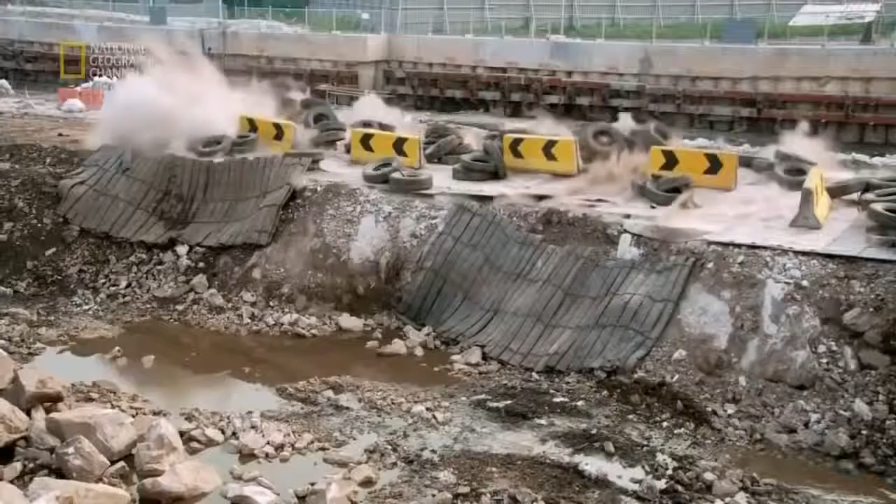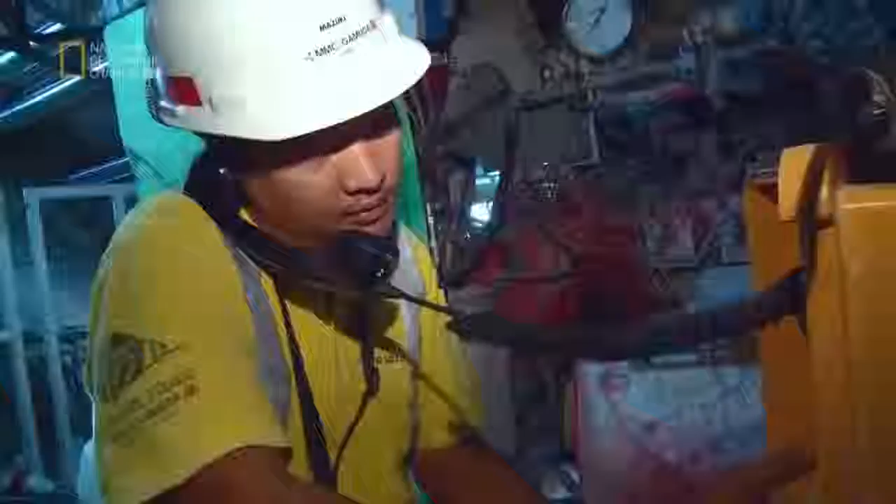Now there's an ambitious solution: a new transit system that will crisscross not only the city, but the entire region of Greater Kuala Lumpur. Huge machines will bore into Kuala Lumpur's treacherous bedrock to carve out almost 20 kilometers of tunnel. Every day of construction, the engineers confront the perils of mechanical failure, fire, and collapse. Get it wrong and billions of dollars of investment could go to waste, and the streets of Kuala Lumpur and its pent-up economy will stay trapped in gridlock.

Kuala Lumpur is one of Asia's most vibrant cities. It's looking to compete with the region's Asian tiger economies. Its magnificent skyline testifies to its soaring ambition. But at street level, it's a different story. The city is blighted by severe congestion that threatens its future growth.

Over 7 million people live and work in the Kuala Lumpur region, the Klang Valley. Every day, they head into town in 4 million cars. As an alternative, a light rail transit system was built. But over time, it has been overwhelmed, and connections are inadequate.

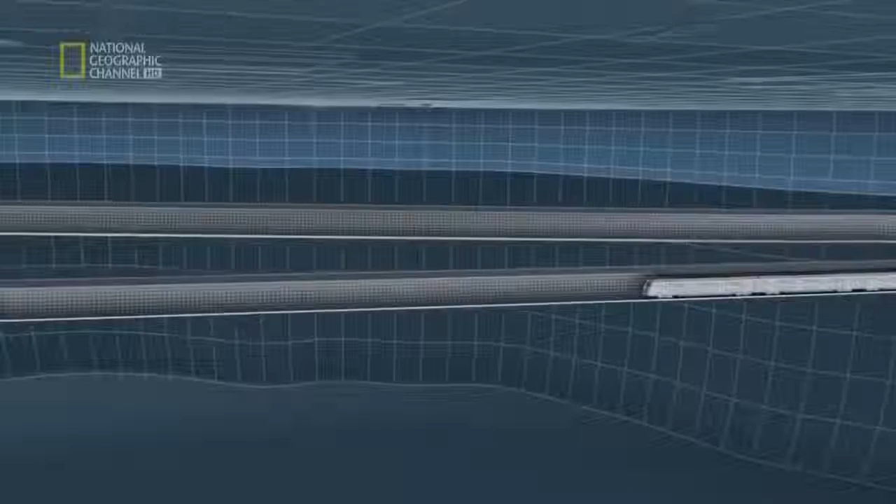Now there's a solution: a new mass rapid transit system that will reduce the pressure on traffic and unite far-flung parts of the city. For any modern metropolis to be vibrant, to be competitive, to be on par with some of the leading cities in the world, you've got to have a modern public transport system.

The Klang Valley Mass Rapid Transit System, the KVMRT, is Kuala Lumpur's bid for greatness. 3 different routes comprising more than 150 kilometers of brand new lines. It will be seamless travel around the Klang Valley, especially the areas of high concentration population.

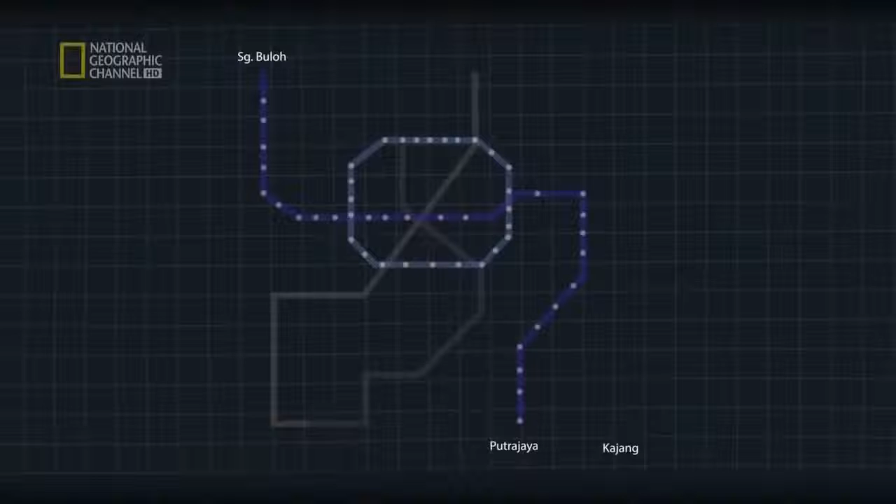And the first stage of the plan is the biggest test of all. This is the Sungai Buloh Kajang line. It will stretch 51 kilometers with 31 new stations. And a fifth of the new line will have to be constructed underground. To do this, 10 giant tunnel boring machines, or TBMs, will be brought to Kuala Lumpur and set to work.

These mighty engines do much more than burrow through rock, astonishing though that process is. As the huge drill crunches forward, the back end constructs the tough tunnel frame with high-strength concrete.

In charge of this massive operation is engineering veteran Satpal Bogal. Most cities now, for railway mass transit systems, the tunnels are built using TBMs because of safety issues and because of ground conditions. The underground section of the new MRT will be a perilous undertaking.

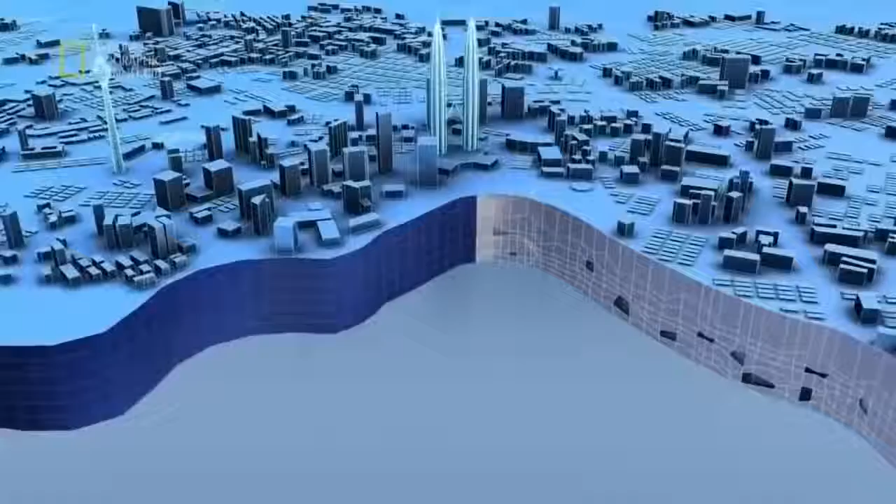For beneath Kuala Lumpur is a formidable engineering challenge. Below the city are 2 very different kinds of rock, and the TBMs will have to deal with both. The western area is known as Kenny Hill, and the eastern areas as the Kuala Lumpur limestone. Imagine the difference between a Dutch Edam and a Swiss cheese riddled with holes.

Dr. Uilian Hock is the project geologist and expert on Kuala Lumpur's underground world. I got this Dutch Edam cheese here. As you can see, this whole piece of cheese is fairly homogeneous, very tight. And Kenny Hill, when it's bedded, it looks something like this. This is like the KL limestone. All right, this is Swiss cheese. As you can see, there are a lot of cavities and voids inside the cheese. These voids can be transmitted all the way to the other side of the cheese. Things can move in from one hole to another hole, and it may come in vertically and go out laterally.

The most formidable challenge lies beneath the eastern areas of Kuala Lumpur, which rest on a huge slab of limestone. Over millions of years, torrents of acidic rainwater have eaten away the layers of rock to sculpt a hidden landscape of pinnacles, cavities, interconnected passageways, and colossal caves.

Around me here on my left is a surface karst, or a limestone hill, you can say. Now imagine when we are underground and all these are covered with soil, it is totally a different ball game. So when you tunnel through this kind of material, there are a lot of unforeseen circumstances which would be a nightmare for tunneling. This is the worst nightmare of all.

The drill head hits weak cavities and the rock caves in on the cutter head. The solution is this stuff, slurry. At the head of the drill is a high-pressure chamber that injects a liquid called bentonite slurry into the cavities before they can collapse.

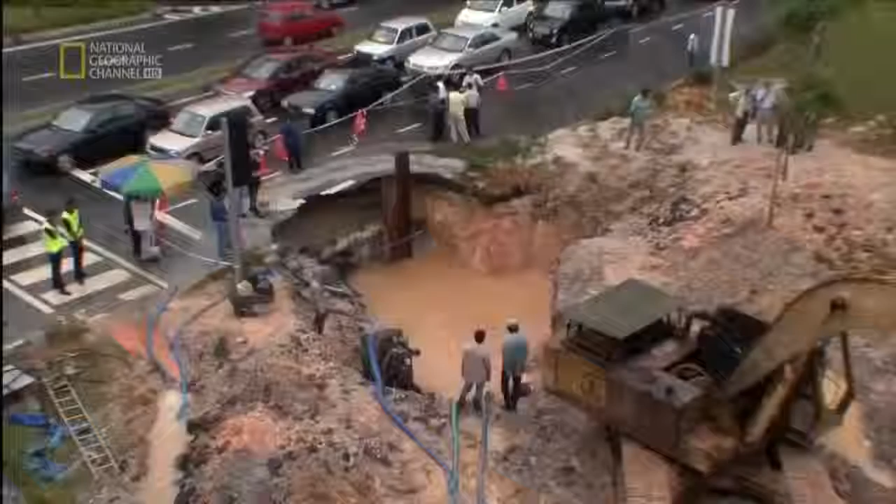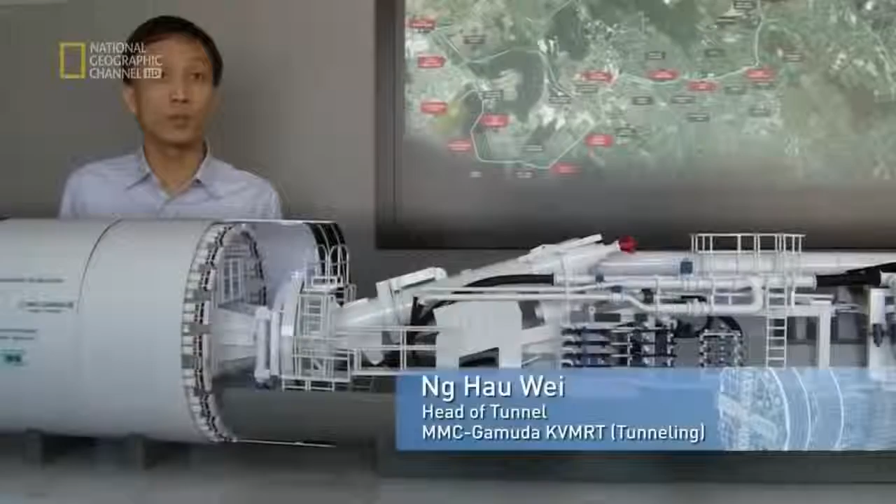This ingenious system was used by the engineers who built the SMART tunnel in Kuala Lumpur, the world's first combined storm and traffic tunnel. But builders learned some hard lessons about slurry. Ng Hau Wei was a rookie engineer on this project. We have the best machines in the world in the SMART project, but we still do have some problems.

We just couldn't control the slurry and it easily escapes to the surface, creating sinkholes. What Ng and the engineering team found, to their cost, was that the slurry they injected into the limestone cavities could escape into surrounding rocks and cause havoc, bursting from the ground like a geyser or creating sinkholes at the surface that might suck in people, cars, or buildings.

Today, Ng heads the tunnel team building Kuala Lumpur's MRT system. And this time, he had to find a solution to the uncontrollable slurry problem.

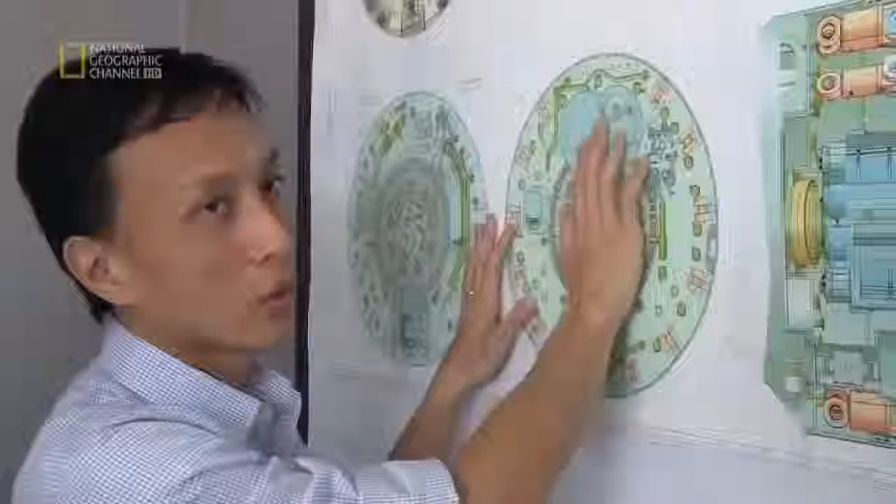Working with German company Herrenknecht, Ng and the team of engineers have come up with a revolutionary kind of machine. We throw in all the ideas, we have brainstorming sessions, we consult a lot of experts, we have to do a lot of research because no machine has been designed like this before.

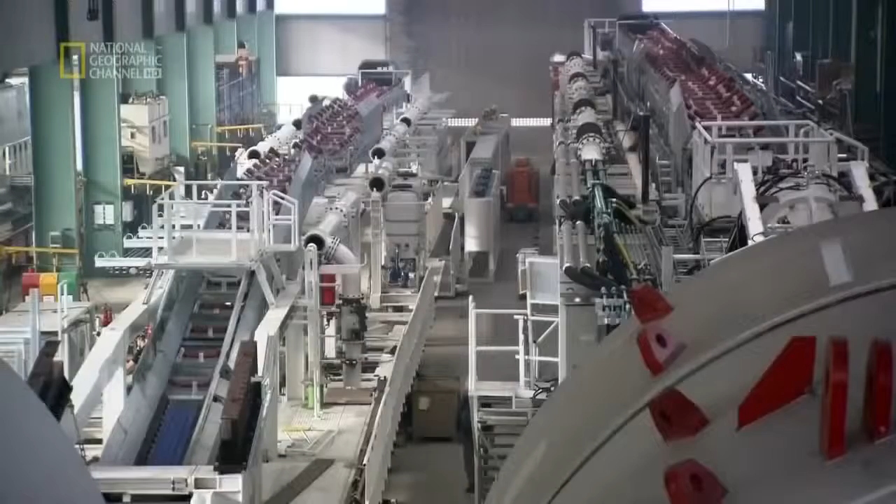From these brainstorming sessions was born this mighty machine. Called the Variable Density Machine, it's the state-of-the-art tunneler. For the first time, a TBM can control the consistency of the slurry and take on whatever Kuala Lumpur's underground throws at it. Even the construction of this revolutionary machine is on an epic scale.

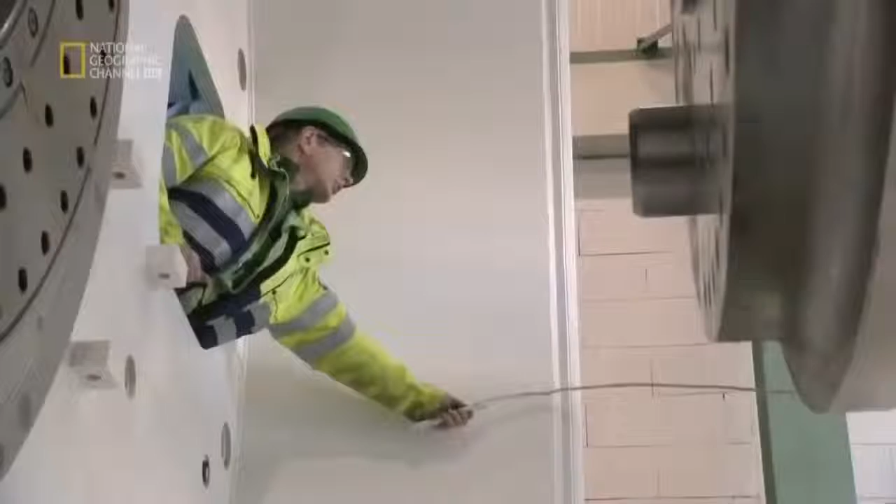Components are brought from all over Europe to be assembled inside the massive factory in Schwanau in Germany and other Herrenknecht plants in China. One machine like this is fiddled together, you can say, with about 40,000 pieces, one by one.

The design starts screw by screw, piece by piece, and this is brought together with all our 400 engineers. They do all these works to come to this level, what you can see today.

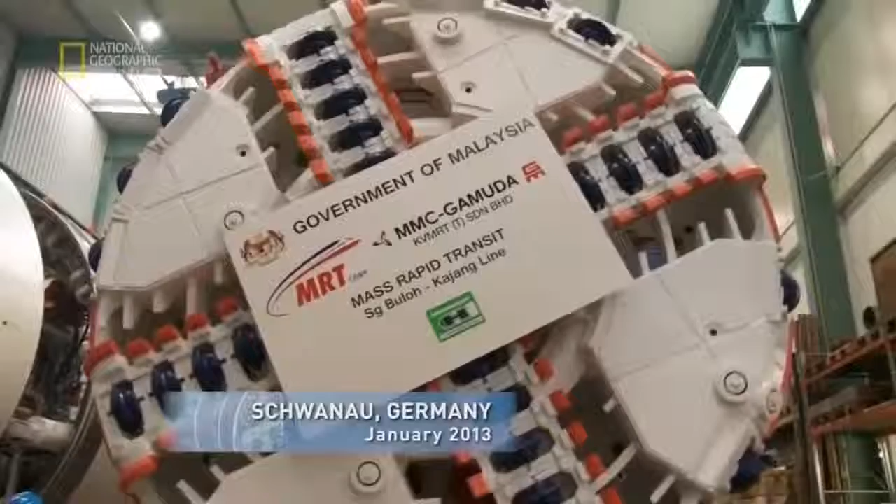It takes 9 months to manufacture the revolutionary TBM. Today, it's ready to be put through its paces.

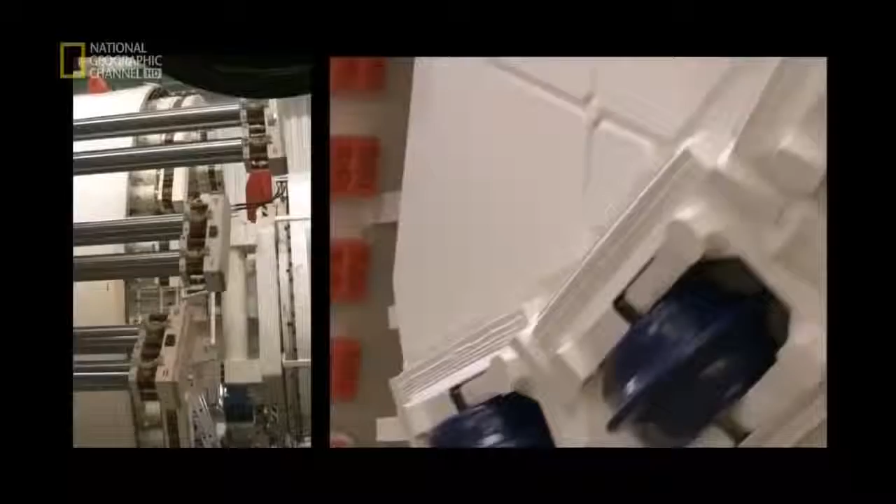We have only seen it on the drawing board so far, so this is the first time that it is all put together. Everything is running, so we can check every equipment, including the cutter heads, the hydraulics, the safety features. This is the last chance for us to make final modifications before we send it to the site and put it in the ground.

As the engineers work on the TBMs in Germany, work gets underway in Kuala Lumpur. The engineering company in charge of tunneling, MMC Gamuda KVMRT, must complete the job in 24 months and with minimum disruption to the city above.

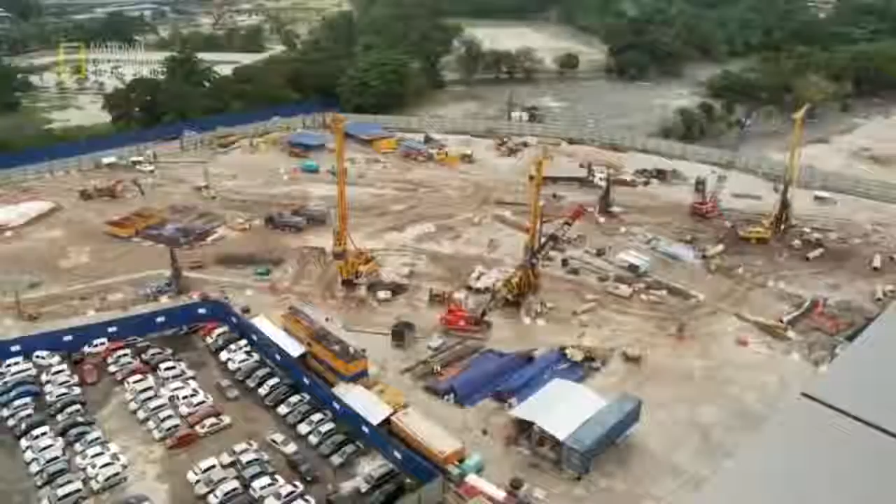The operation is conceived on a military scale and with military precision. The TBMs will be launched from 4 different staging zones along the planned route of the underground section of the MRT. At the western end of the tunnel, the elevated section of the MRT begins its descent underground from the surface. But at the 3 other zones, shafts must be excavated so that the different TBMs can be put to work beneath the city. Eventually, the different sections of the 9.5-kilometer tunnel must all link together.

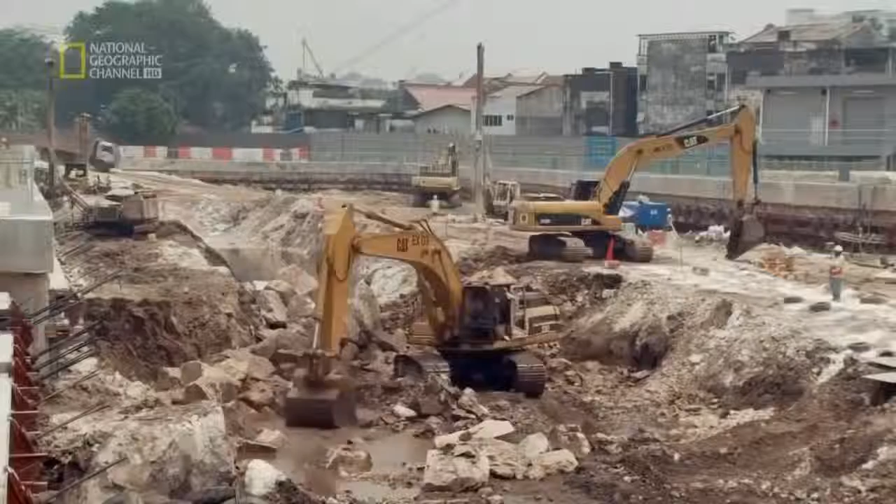Since July 2011, work on Kuala Lumpur's new MRT starts here at the Cochrane site. It must be dug out to a depth of 30 meters before 4 TBMs can be deployed. The huge staging zones will be blasted out of the ground.

We have short time to meet our requirements, so we are working with frequent blasts, more than 2 or 3 blasts a day. The blasting must be carried out with rigorous precision, especially in a city as dense as Kuala Lumpur. So when you talk of blasting itself, it's dangerous.

You can see we've been surrounded by high-rise buildings. Now at the moment you're using about 150 to 200 kg. So that can bring a 10-story building down. The solution is to sequence each blast, creating a pressure wave that, in theory, won't damage surrounding buildings.

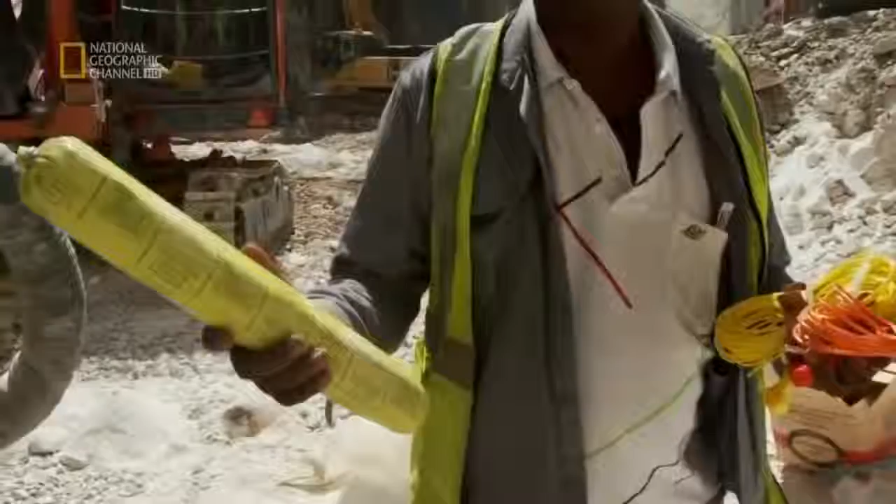These are the basic things we use. In my hand now is explosive, which will be charged to the detonators over here, and it will be connected one at a time, and finally we have relays. These will segregate the blasting rather than at one go.

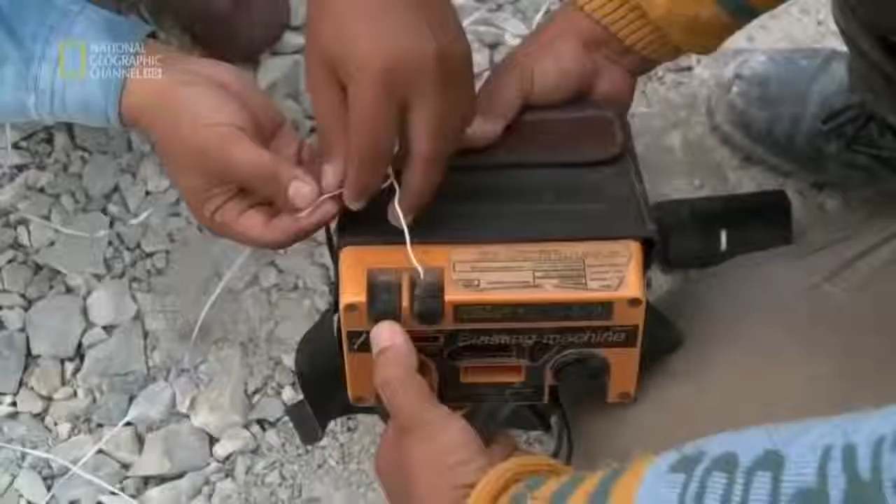Engineers dig rows of holes between 3 to 6 meters deep. Then the explosive charge is inserted inside with a detonator. These are connected to a central command point. But nothing is left to chance. Giant barriers of steel plates, truck tires, and concrete prevent debris flying from the site. The charge is set.

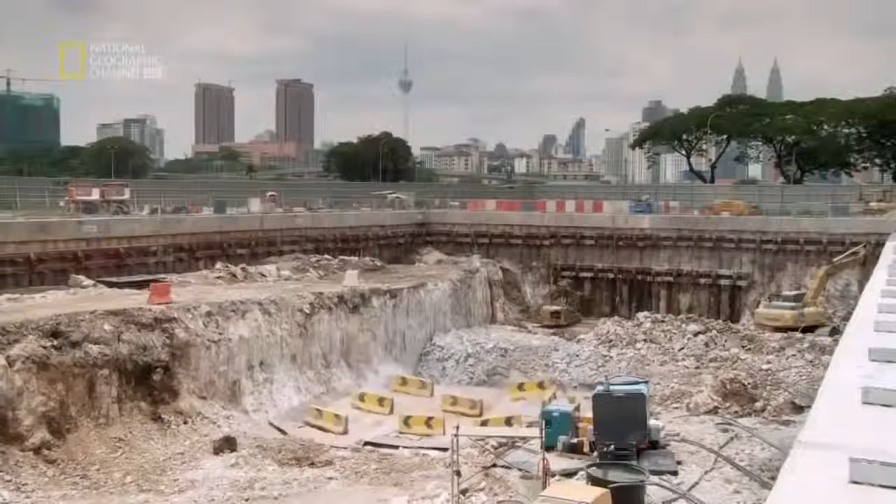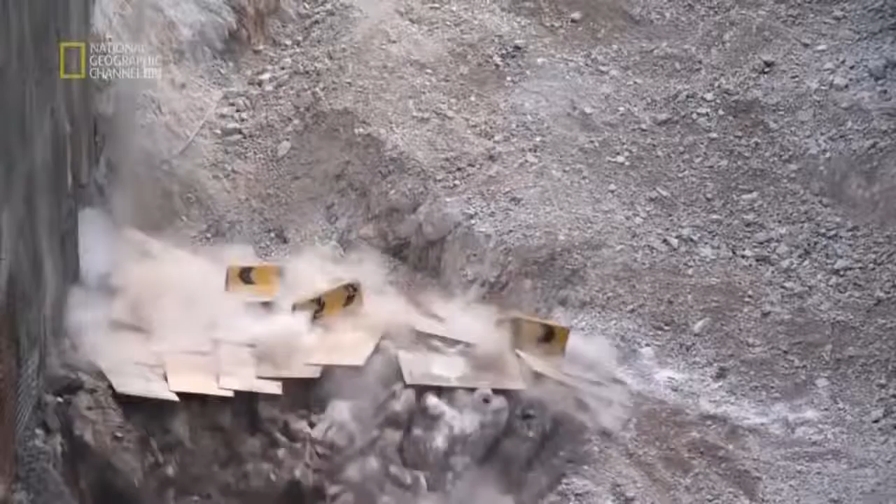The engineers have got the right formula, and the surrounding buildings are safe. The blasting continues at the Cochrane site for 7 explosive months. Enough rock and soil to fill 50 Olympic-sized swimming pools is blown out of the ground.

Finally, the site is ready to receive the first TBM, code name 774. At the beginning of 2013, the first new model arrives in Kuala Lumpur, transported in parts to the Cochrane site on huge lorries.

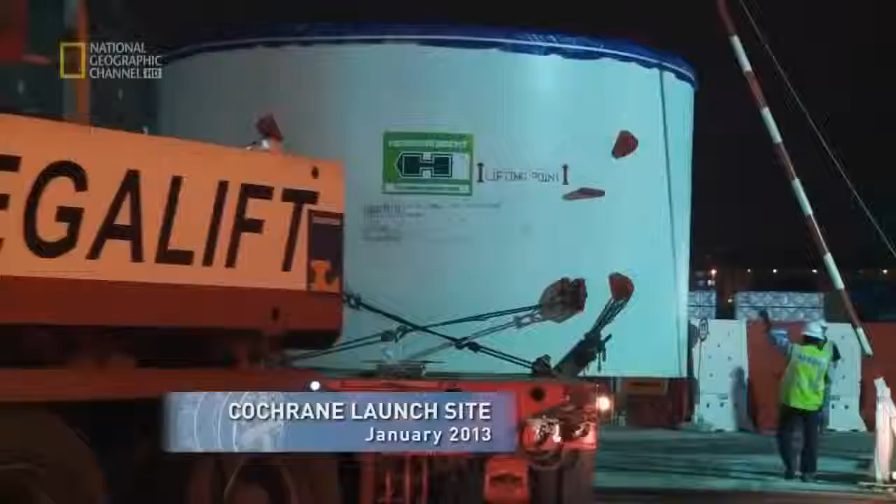But that's the simple part. Now the 160-ton monster must be lowered into the excavated shaft so it can start chewing into bedrock. To lower it 30 meters down the shaft, we have to be very careful. Anything can go wrong and then we are stuck, which will push back the whole project completion by a lot.

At the site, everyone is holding their breath as the TBM begins its descent underground.

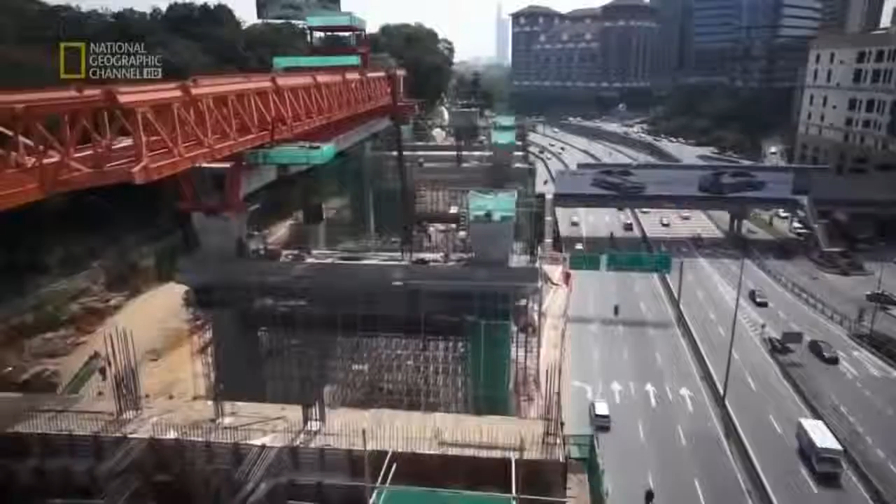Malaysia's capital, Kuala Lumpur, is being transformed into a huge building site. A new MRT system is under construction. Close to 10 kilometers will be built beneath the city, and a revolutionary new tunnel boring machine, or TBM, is brought from Germany. The first to be sent into action weighs 160 tons and has to be delicately lowered 30 meters to the tunnel entrance.

The man in charge of the tunnel operation is Ng Hao Wei. He won his spurs building Kuala Lumpur's famous Smart Tunnel. We are dealing with very delicate components, he says. We cannot afford to damage it. If the extent of damage is huge, then the impact to the project will be tremendous.

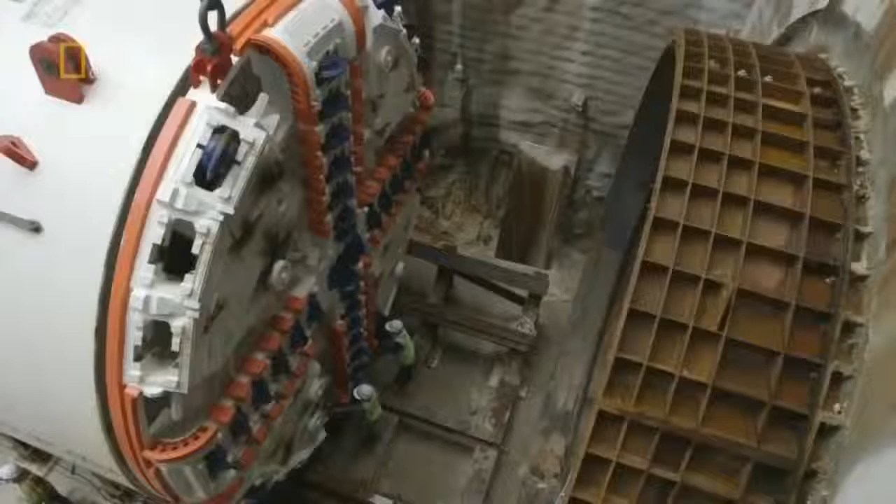This is literally the cutting edge, the business end of the huge machine. The circular cutter head weighs 70 tons with 37 tungsten carbide cutting discs, which are stiffer than steel and denser than titanium. The entire TBM is 135 meters long, almost double the length of a 747 jet airliner. Each TBM has 10 interconnected gantries to support the operation.

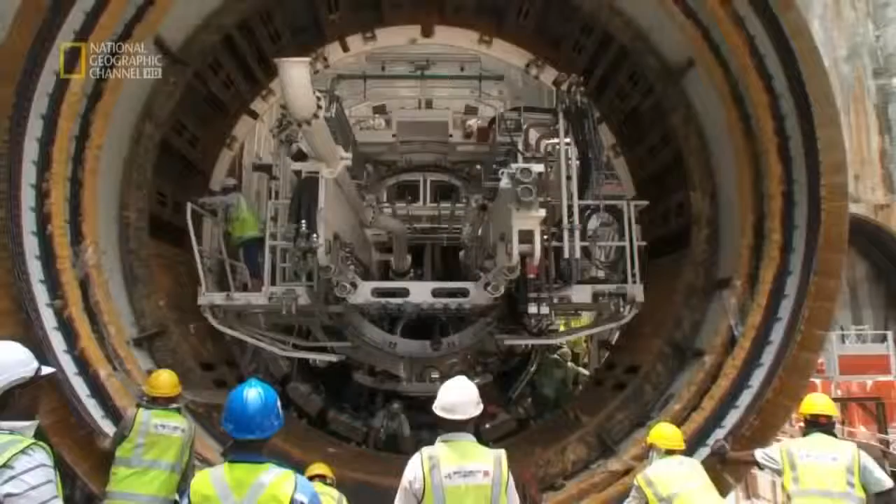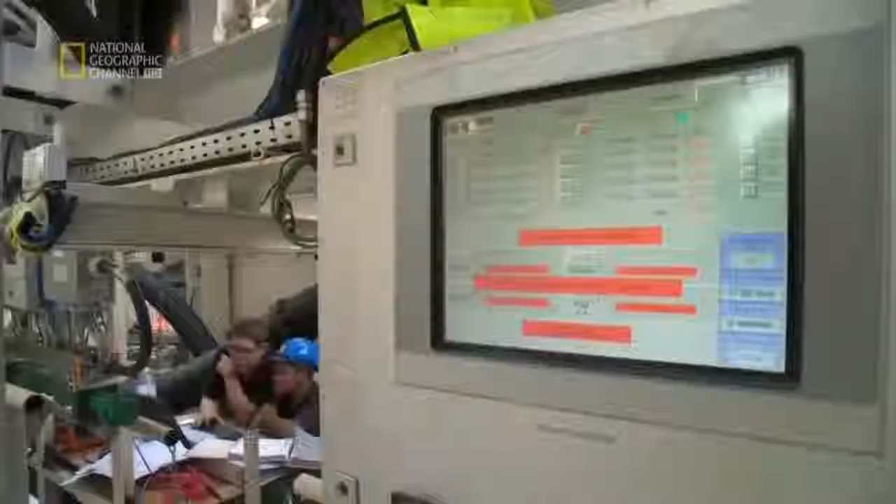Only three-quarters of the shaft has so far been excavated, so the monster machine has to be assembled in sections. We assemble up to the 6th gantry, which gives us the key components of hydraulics and electrics, so we can start to launch the machine, while at the same time giving sufficient space for the shaft excavation to continue. It takes just under 3 months for the TBM to be assembled.

The Prime Minister of Malaysia launches the very first variable density TBM. It's actually a technological marvel, and it goes to show that, in partnership with a German company, Malaysians can offer a lot of our technical guidance and advice. This is something we can be really proud of.

One day later, Ng Hao Wei and his mentor Gustav Klados arrive to check on the machine's progress. Gus, a veteran Hungarian tunneler, has worked on some of the biggest tunneling projects in the world, including the Channel Tunnel linking Britain and France, and the Smart Tunnel here in Kuala Lumpur. This tunnel warrior is the team's project manager and is thrilled to be working back in the city on the new machine.

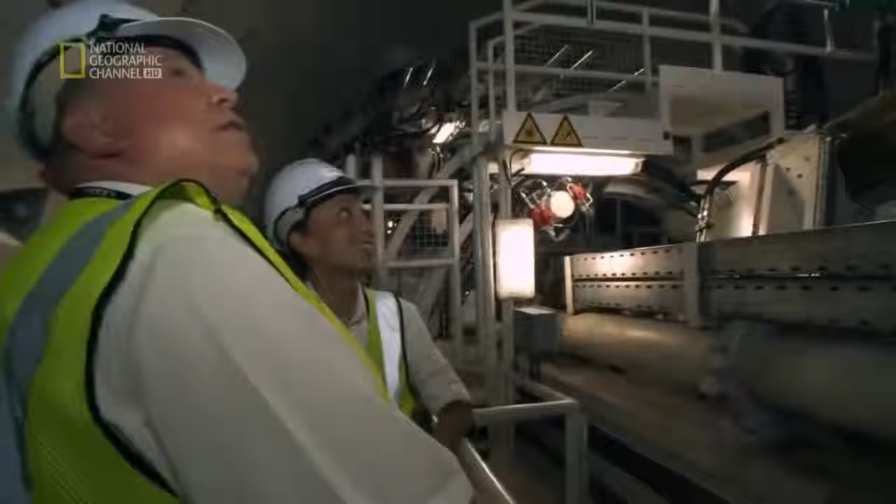It's uncharted territory. We are trying out something totally new. A lot of people at the beginning said no, it won't work. But now it is excavating. You can hear the stones moving around in the pipe, so it's a fantastic noise. It's my favorite, much better than in the office.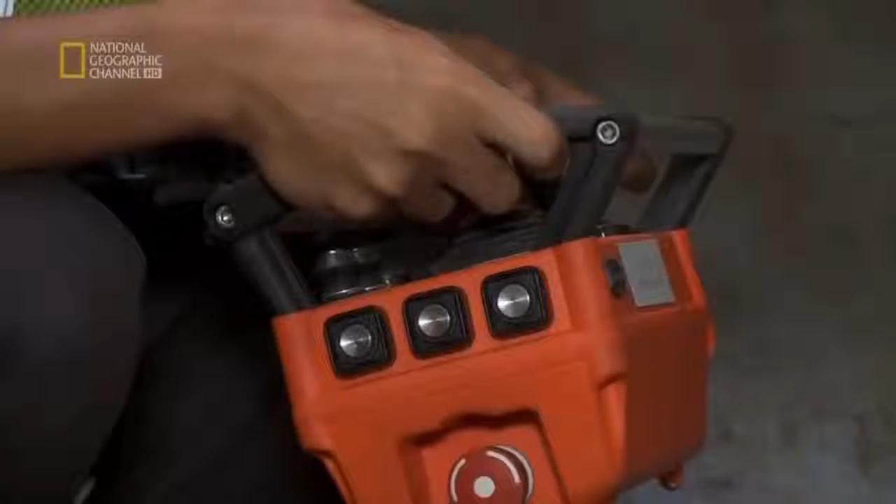It's not just the machines that will need breaking in. The giant TBMs must be served by an army of workers, day and night, week after week, month after month.

I'm new here, but I try to make my best every day. Everybody starts as new, trust me. Yeah, me too. I did start as a new guy. My first job was to go and count the number of nails and bolts and nuts in the stores. I went there and literally counted them for a week. When I finished, I went to the storekeeper and he told me we usually use a scale.

The MRT tunneling project will need thousands of workers over the 2-year period of construction, and MMC Gamuda set up an academy to train the hundreds of workers needed to finish the tunnel on time.

Veteran or newcomer, the team faces a daily avalanche of problems, and right now the problem is pretty basic: the TBM is just not picking up speed. 8 millimeters a minute, not very fast. Yeah, but it's all right.

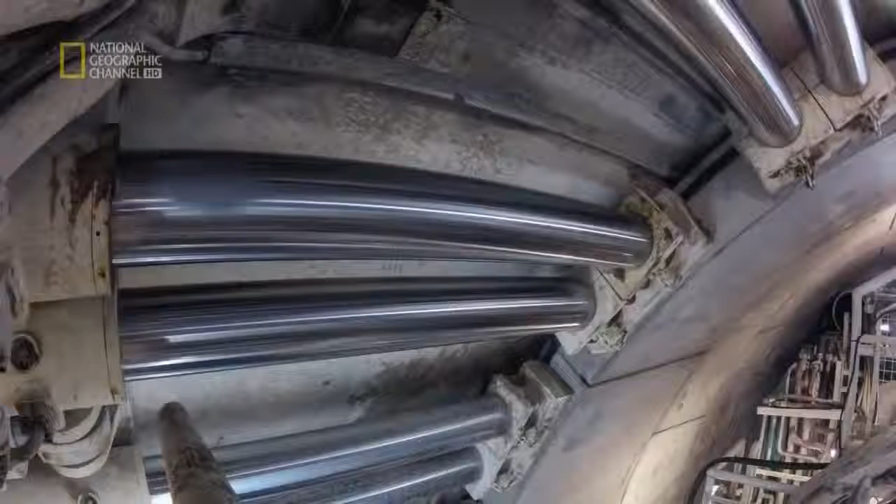At this pace of tunneling, the project will take 4 years longer than expected and run millions of dollars over budget.

Veteran engineer Gus Klados hopes that the giant machine will soon pick up speed. In the next few months, it is just to sort of break in the machine like a horse which has never been ridden before, and I am convinced that we will make it work.

The team is under pressure to complete the tunneling works on time. In the tunnels, the TBMs never stop mining. It's a 24-hour operation. Three weeks since mining began, the giant machine has at last picked up speed.

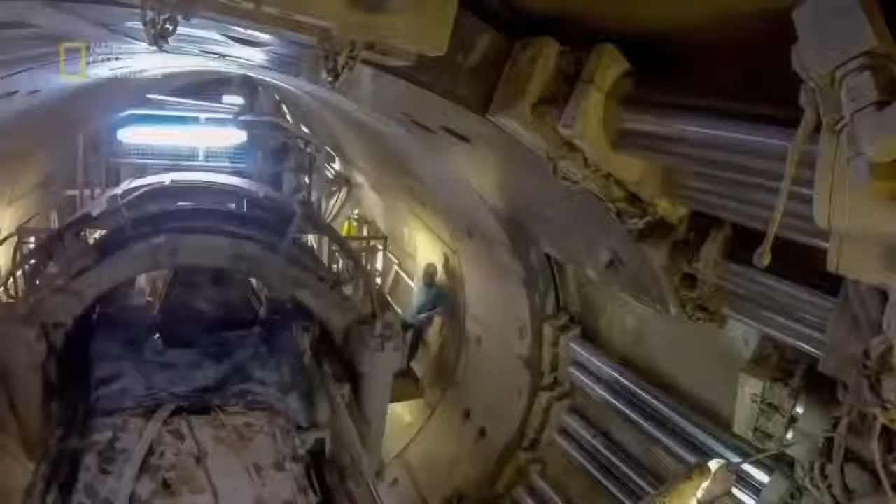The TBM is like a huge underground factory, drilling, building, and spewing out waste. The heart of the entire operation is in this tiny space. So what's happening? Pressure sensor number 4 has a broken wire. Control cabin means the heart, the control center of the TBM where everything is controlled.

If you're building a skyscraper, visibility is not normally a problem. But underground, it's a different story. You can't see through rock. So to give the TBM underground eyes, the machine is equipped with arrays of sophisticated sensors. It's like working in a submarine. You have to depend on the sensors, you have to depend on communications, you have to depend on eyes. Other than yourself, you can't see anything.

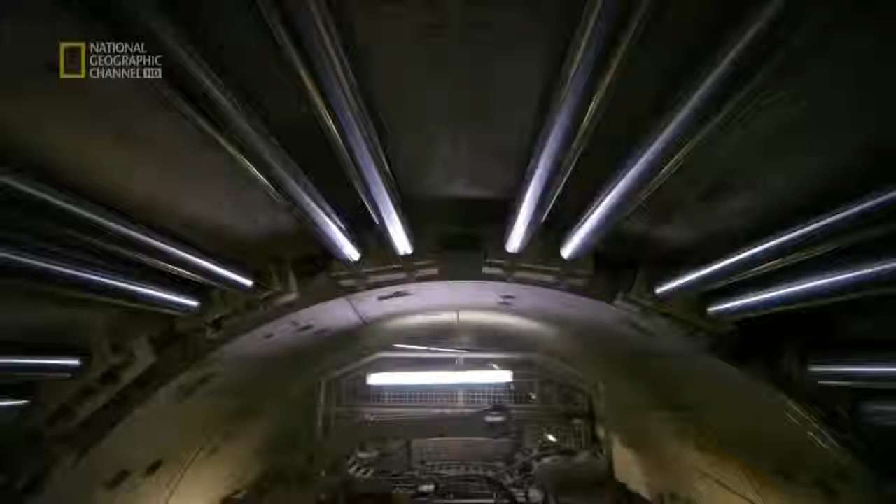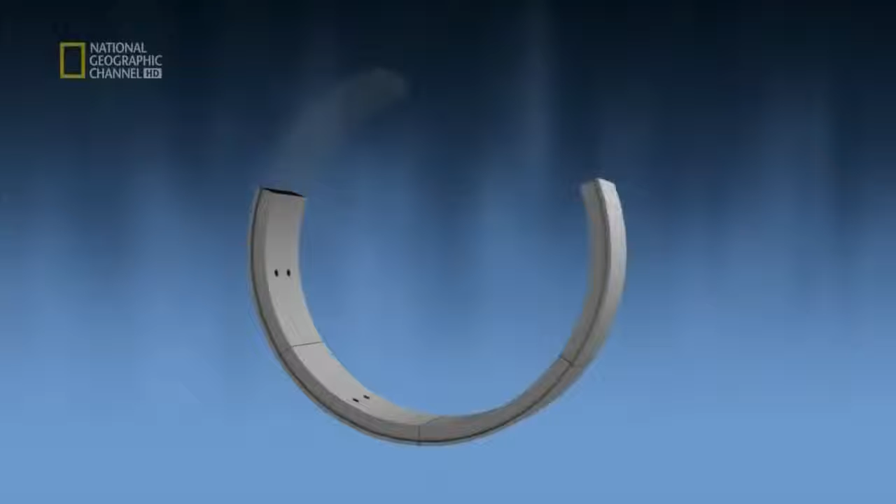Inside the control cabin, engineers can work out with absolute precision the real-time position of the TBM, calculate changes of direction, and when to start lining the tunnel wall. After mining about 1.4 meters, we will build the segments piece by piece, building them up like a jigsaw puzzle. These tunnel rings are made from 7 segments plus 1 keystone that holds everything together.

The concrete wall segments can withstand extreme pressure 30 meters underground. All day long, concrete segments arrive at the TBM, each weighing 2.2 metric tons. Giant hydraulic arms swing the segments into place using the TBM's vacuum erector, which uses the power of suction to raise and position each segment.

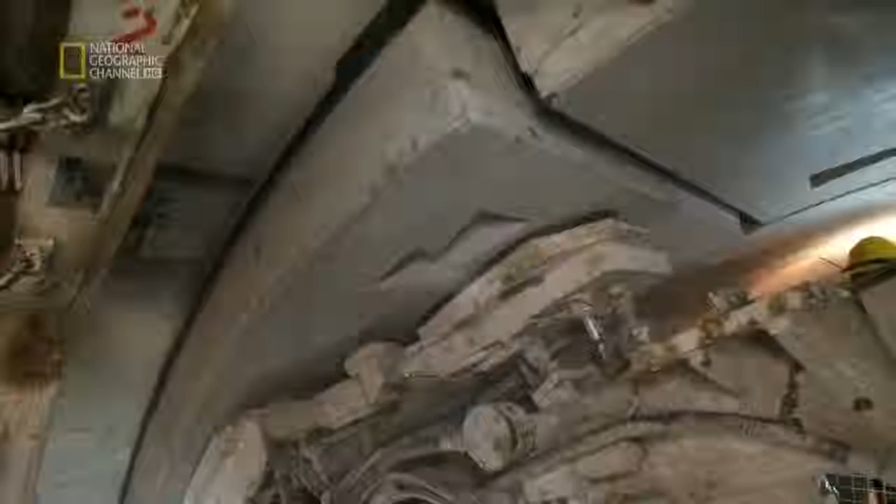Precision is essential. If any one of these segments are wrongly positioned, the consequences would be catastrophic. So it's very important for the ring building team to build to the required tolerance of a few millimeters deviation. If we are out of tolerance, water will find its way to seep through, and we'll have a great problem to seal it up.

Over time, as graduates of the Tunnel Training Academy get more experience, the process builds up momentum. In the first week, the teams managed to place just 3 rings a day. Three months in, the rate is 5 times higher.

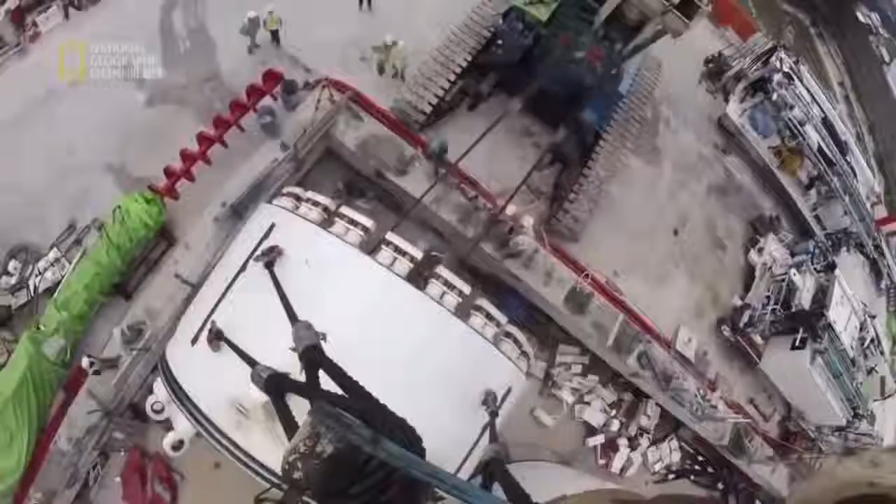The campaign to excavate Kuala Lumpur's new MRT tunnels is about to enter a more intense phase. By November 2013, 4 TBMs have been successfully launched from the Cochrane site. But at another launch site near Inai Road, the engineers have run into difficulties. Here, 2 circular shafts are being excavated to 30 and 45 meters in depth.

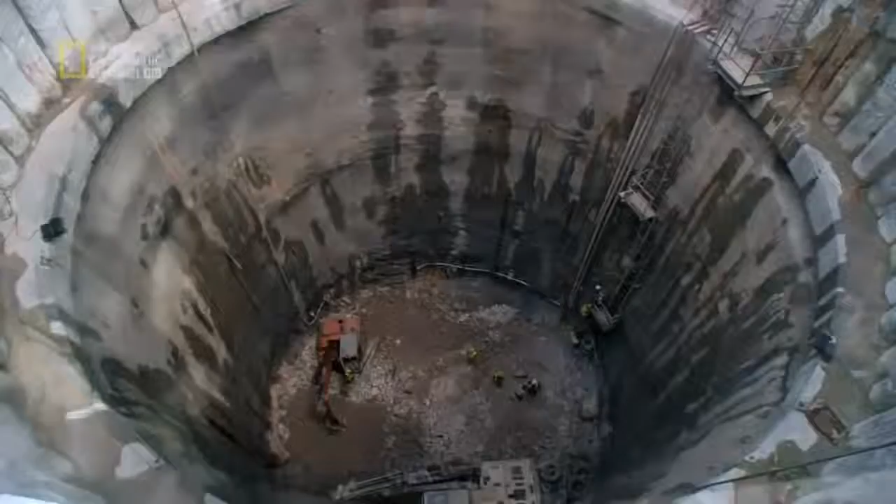But as the shafts are blasted out of the ground, disaster strikes.

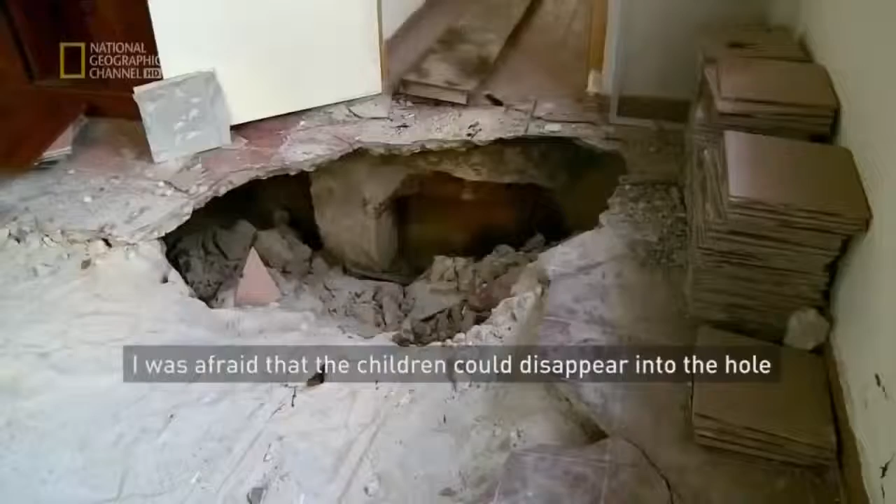In the heart of Kuala Lumpur, the new MRT project has hit a snag, a hole-shaped snag.

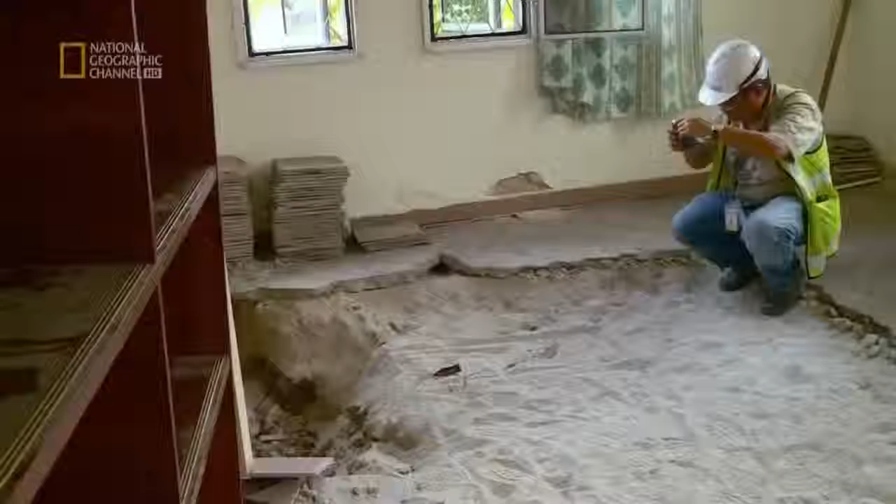Terrified, Mr. Jamal calls the company in charge of the MRT project. When inspectors see the condition of his home, they make an immediate decision to move the family out. Engineers now need to explain what has gone wrong and whether other homes are at risk.

In limestone, what happened is that the solution features can be connected laterally and vertically. What happened is we drill a shaft, so this hits a connection. When there's a hole, it's like a pipe culvert. If you have a culvert connecting from the shaft to underneath Mr. Jamal's house, that forms a very easy flow passage for water, bringing the soil from underneath the house into the shaft. And that results in sinkholes.

And it's not only Mr. Jamal's house that's in danger. Water is pouring in from the walls in the deeper of the 2 Inai shafts.

It's unstoppable, and the situation is a tough call for project director Satpal Bogal. We couldn't stem it, and the decision was taken to backfill it for safety. That decision then followed on to other changes to the program.

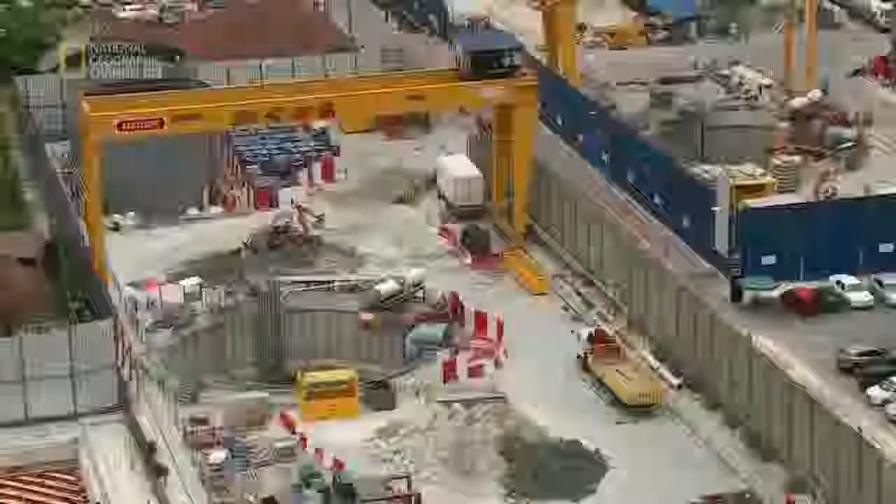Abandoning one of the two Inai shafts is a huge setback. Now only one TBM can be launched from here, meaning a new strategy has to be devised. The first TBM brought to Malaysia, 774, which has been mining from the Cochrane site, must now make up the difference and tunnel more than twice the distance. It will put the complex machine under severe strain.

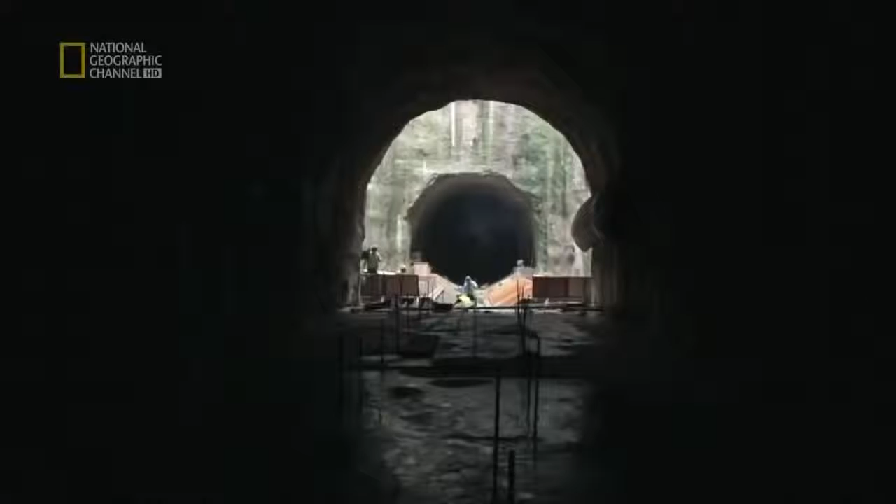It's not only flooding that makes the Inai launch site such a headache for the engineers, it's also a very tight fit compared to the other launch sites. Tunnel engineer Aslan Marzuki is in charge of getting the huge TBM to the bottom of the shaft. It's a smaller shaft, not a square, it's a circle. That saves space, but it means our launching is going to be staggered.

The team will blast out tunnels on both sides of the shaft, then the front section of the TBM is inserted. Next, three out of the ten gantries will be lowered one by one, followed by the giant screw. The problem is that the 18-meter screw segment is longer than the width of the shaft.

Behind me, this is our biggest component that's going to be lowered down. It's the most difficult one because this length is actually bigger than the shaft itself.

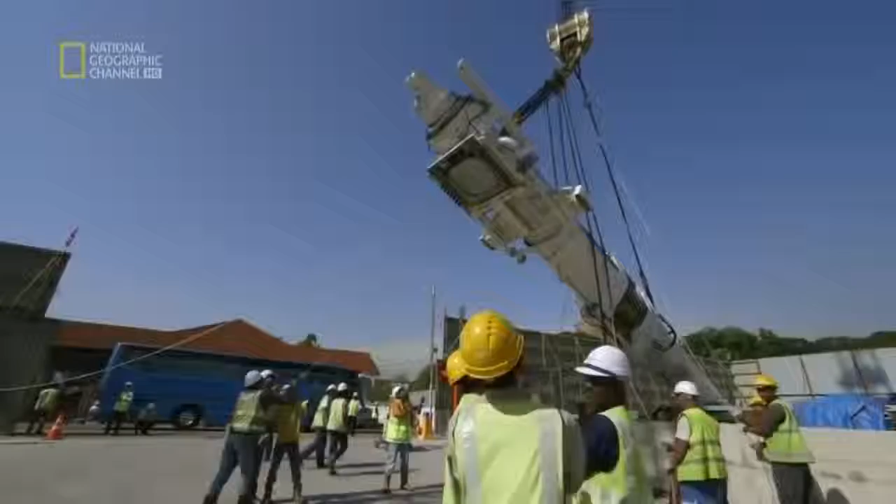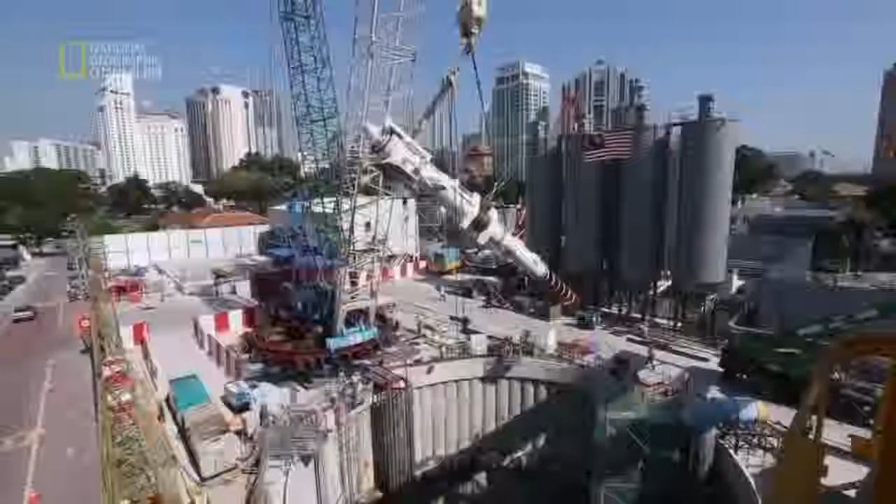The solution is simple, but risky. The screw segment of the TBM will have to be lowered into the shaft at an angle. We have to tilt the screw conveyor at a 56 degree angle. You have to use a chain block, a hand winch, to pull the machine upwards. It sounds simple, but that giant screw weighs a whopping 15 tons, and any deviation from that critical angle would be catastrophic.

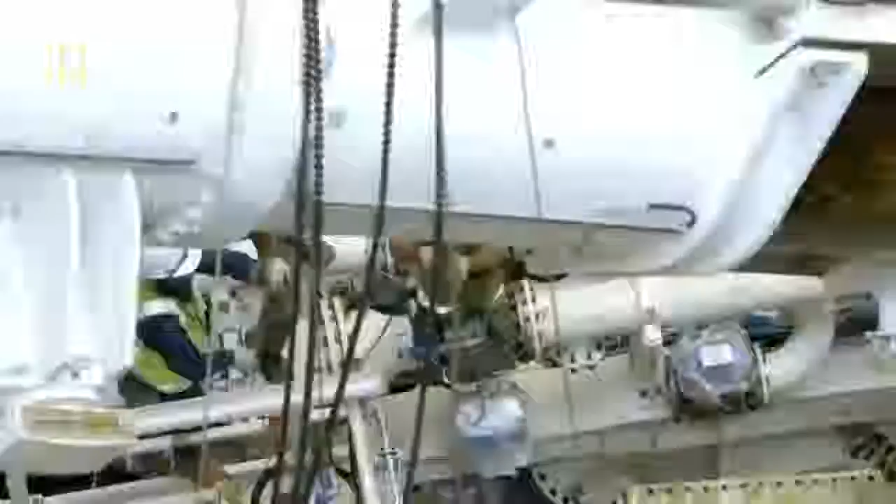At the bottom of the shaft, the engineers face another challenge: the angle of descent has to be lowered. It's another fiddly maneuver with a lot of complicated machinery at stake. When you lower it down, the final angle is 15 degrees. Down there you still have to do the same exercise again, but it has to be a slow process. After two hours, the screw conveyor is finally in place.

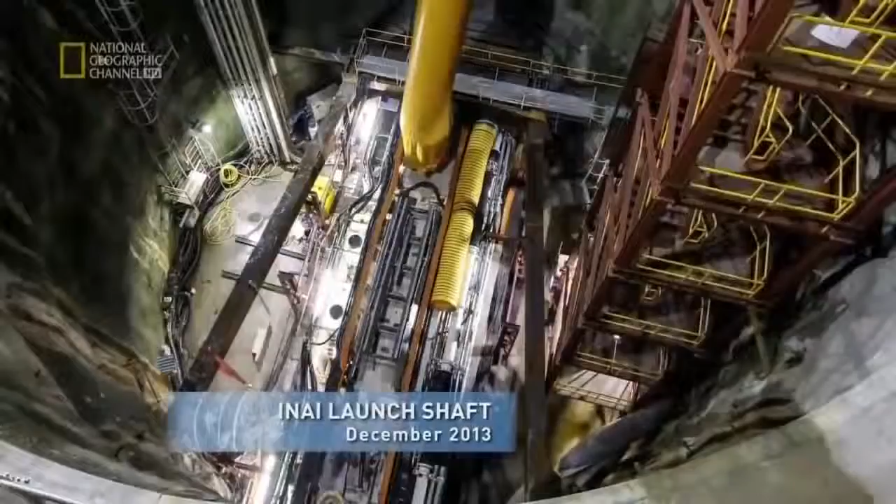It takes three months of hard slog to put the TBM together, but at last it can begin burrowing into the limestone. This underworld is packed with hidden dangers. Like Swiss cheese, the rock is riddled with cavities that could wreck the multi-million-dollar boring machine.

When you're tunneling this way and you have a cave directly underneath your cutter, and it's big enough that you cannot develop a face support, the thing just dips inside. In that situation, then we are snookered. It will take us months to recover, to bring that TBM cutter face into operations again.

So as the huge drill edges forward at 14 meters a day, an army of engineers is busy scouting the perils that lie ahead. They drill hundreds of boreholes into the layers of rock.

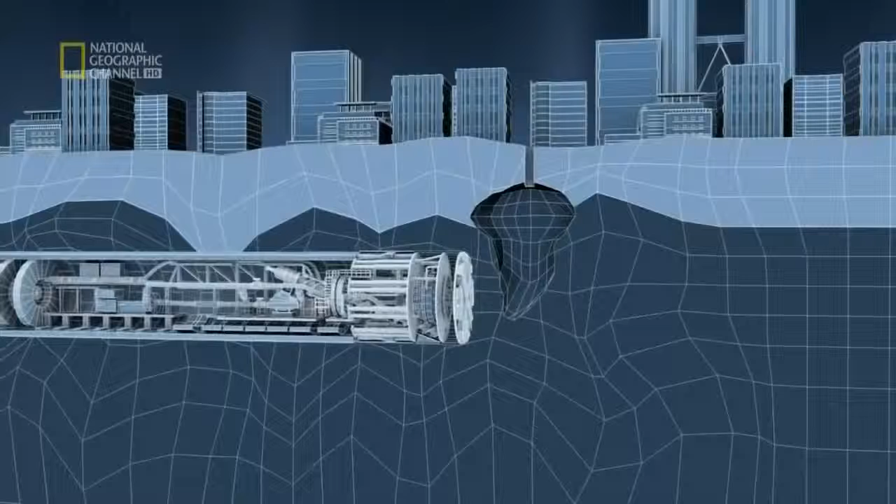Once a cavity is detected, concrete is poured into the hole to shore it up. It's a process called grouting. If we do encounter such a thing, then we'll do a lot of compaction grouting to fill up this void, like you go to a dentist to fill up your cavity, to ensure that when we are tunneling through, the TBM can go through safely.

But some cavities can be less than a meter wide. These are much harder to fill, but still pose a threat. There's no way we can pick it up. We are unable to treat all these features along our tunnel alignment. So what we then need is a machine that can cater for all these little challenges.

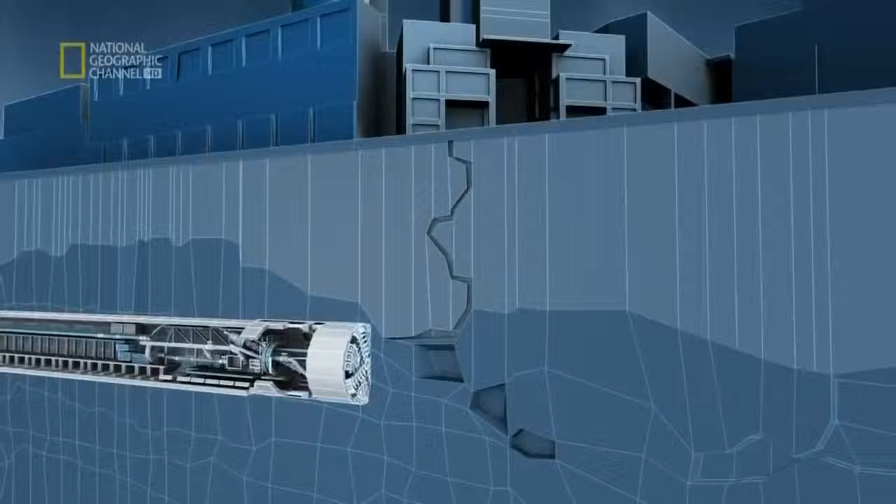Enter the new breed of tunnel boring machines. Behind the drill, a sealed high-pressure chamber is pumped full of liquid called bentonite slurry. Unlike previous models, the new TBMs can control the density of this thick gray liquid, changing the consistency from a thin watery liquid to a thicker honey-like substance. The thicker slurry is used to fill these hidden cavities, and its density prevents it escaping through the porous rock to the surface.

The machine is able to operate in different modes at the flip of a button or some switches. In situations where we have major loss of slurry, we can switch to a thicker density, a kind of paste that chokes up the slurry, and then we can mine through very easily. The revolutionary new tunneling system soon proves to be a success.

But there is a problem that all tunnel engineers fear at the back of their minds: fire, every tunneler's nightmare. For engineers excavating Kuala Lumpur's new MRT system, the most terrifying scenario is a fire in the tunnel. A blaze can suck oxygen from the air in seconds. Workers can suffocate with terrifying speed, and the tunnel itself works like an oven, insulating the environment and ramping up temperatures to deadly levels.

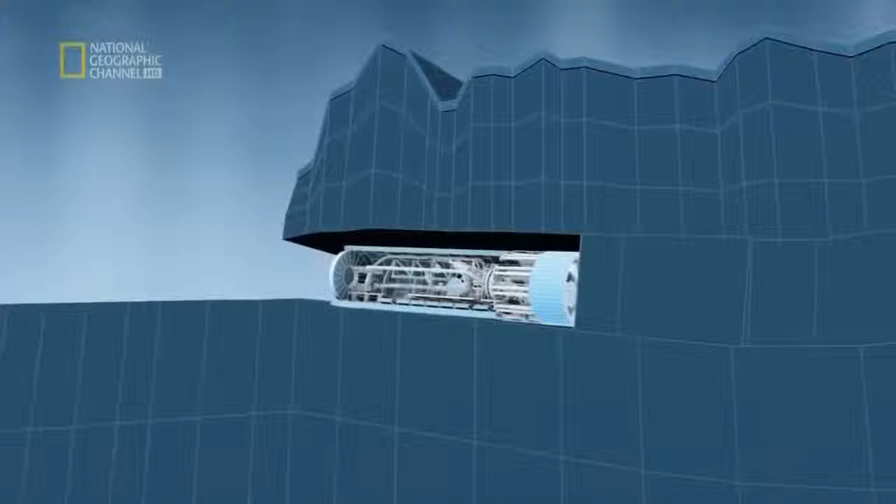Christmas Eve 2013, and the MRT engineers have cause to celebrate. One section of the tunnel, where the MRT line dives underground at Semantan to the Museum Negara station, has been completed. It's the project's first breakthrough, and at any moment the TBM drill head will emerge from this tunnel.

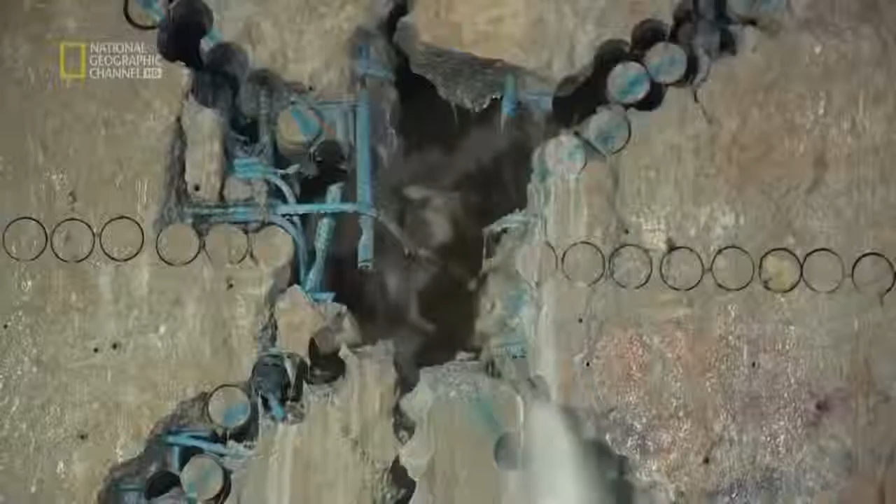It's an anxious wait for tunnel manager Chin Raymond. I told him if it doesn't come in the middle, it has to jump off a cliff somewhere. After drilling for 6 months, the TBM punches through right on target.

Congratulations. Thank you. Well done, man. Okay, good, yes, great. Finally, I pushed my machine, it came in. I've been worried for more than 24 hours. I can have a good rest to enjoy my Christmas.

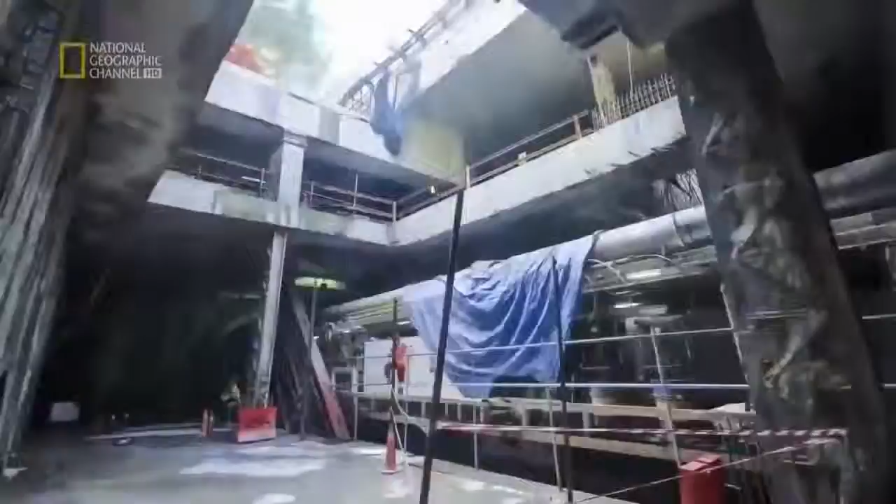But the machines don't get a holiday. As soon as the TBM completes its breakthrough, it is hauled into position to begin work on the tunnel that will link Museum Negara to the next station. The TBM is now burrowing beneath the historical heart of Kuala Lumpur.

The Museum Negara is a repository of the nation's history and culture. Its facade is lined with precious mosaics. Further along the path of the excavation is the old railway station, an icon of the past that stood the test of time. But can it withstand the mighty TBM as it threads its way nearby?

We were stuck with having to cross under some sensitive structures, and the ground settlement would affect the existing structures. If there's too much ground settlement, the buildings could collapse.

For the old buildings, we had to pay much more extra care because we don't know how good the structure is, or how good this building's foundation is. So we had to take extra precaution on that.

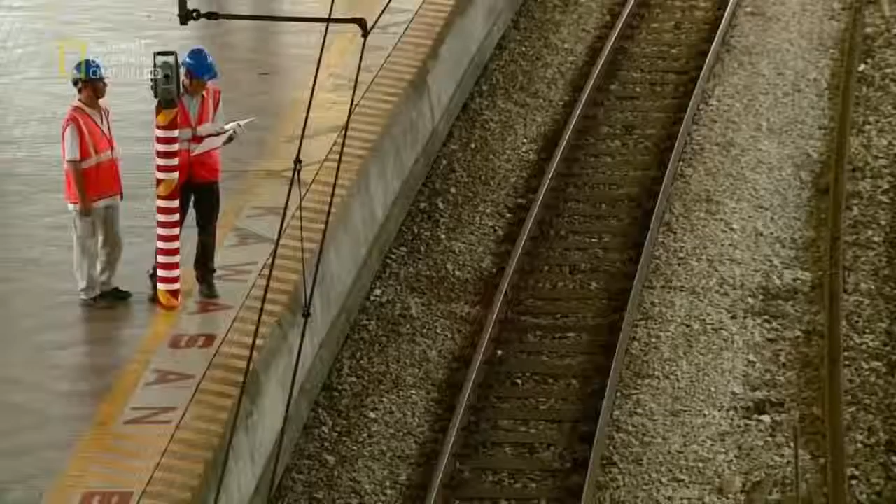A team of surveyors now equip these venerable buildings with highly sensitive sensors that monitor every vibration. As the TBM approaches, Tae Chi Yong and his team of surveyors nervously carry out hourly tests to monitor the old buildings. The TBM is directly below this building. We get to monitor the effects and impact of our TBM drive on the structures above, on the surface above. It's a nail-biting 5 months of constant monitoring as the TBMs negotiate this historic region. And at last, the TBMs inch past - the iconic buildings are safe.

The most powerful man in the world is coming to Kuala Lumpur. All eyes are on Malaysia. But less than 400 meters from Barack Obama's hotel, TBM 774 has come to a standstill. I think we have a problem - the screw conveyor is jammed. Right above the stalled TBM, ominous signs ripple across the road, less than a kilometer from the presidential residence. While the people of Kuala Lumpur get used to living and working in a massive work site, where giant boring machines gnaw away at the city's bedrock to build a new MRT, the President of the United States will be descending on Malaysia in 3 days' time.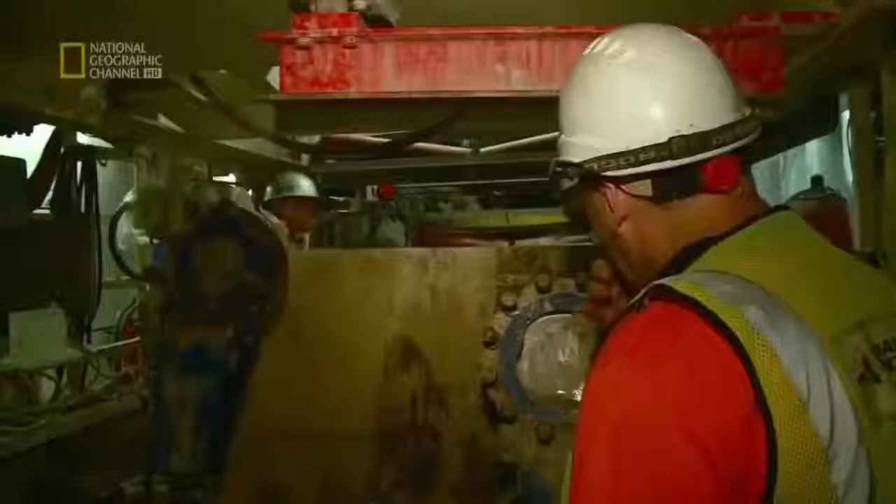But all is not well with TBM 774. Located less than 400 meters from Obama's planned accommodation, the TBM gets a bad case of indigestion and is unable to process the waste from the cutter head. It has come to a halt.

Directly above the TBM, a team is tasked with monitoring road surfaces to look for any signs of trouble. Called the Bull Gang, it is led by Michael Poon. We have a team of people patrolling 24 hours. We have to check on the surface. This morning I walked by and saw some settlement - it's just a small depression. I can see the hole, it's quite deep. At the surface, the cracks don't seem to pose much of a threat.

But like icebergs, most of the danger is hidden. Down there is a void big enough to fit an electric car. We have an unscheduled stop - they have to lower all the slurry. That means the face support is affected, and that causes a depression or a sinkhole in front of the cutter face. An emergency response team reacts immediately.

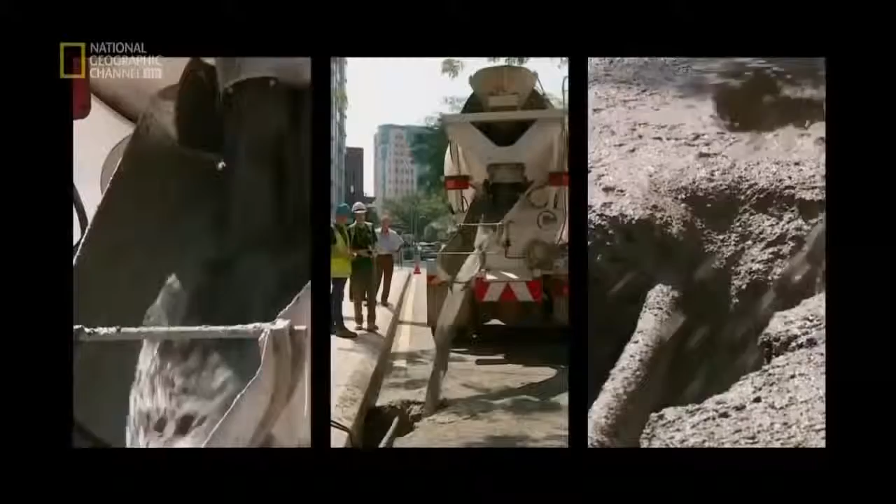The road is closed to traffic. Then we decide to order mortar to fill up the hole. The hole is quickly filled with 5 cement trucks of concrete, and frantic repair works continue inside TBM 774.

Across town, there is reason to celebrate. The 5th breakthrough of the project will take place today. It's a landmark moment - it means that 50% of the tunnel has been completed.

Well, every breakthrough is like a landing on a plane, right? Once you're there, you feel great because you brought home the TBM. The breakthrough, I thought it was very exciting. Now we've finished everything, it's very, very good. I'm very content with the progress as well. The quality of the tunnel linings, the precast concrete inside, is one of the best. We work as a team - we work night and day, blood and sweat, hard time, good time. This is the prize for all the crew. This is like a present.

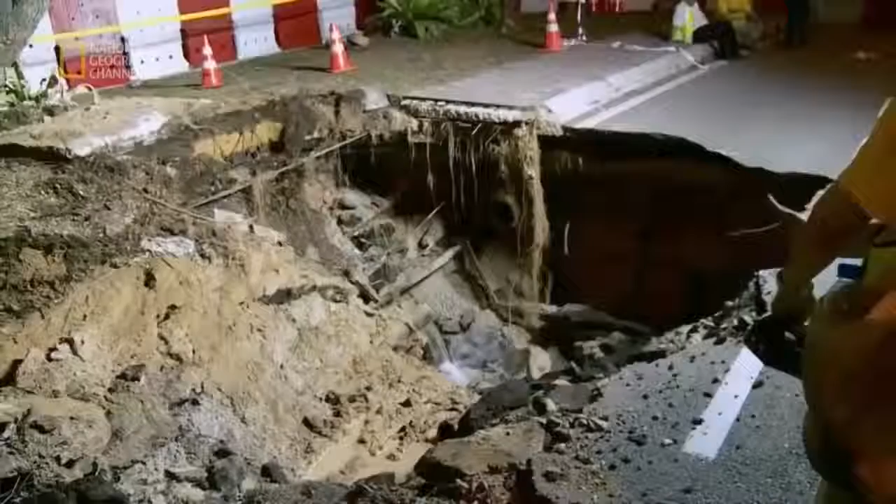But the celebrations are short-lived. As TBM 774 finally starts mining again, President Obama arrives in Kuala Lumpur. But to the horror of the team, another collapse occurs just meters away from the earlier sinkhole as the president is at the official state dinner. This new sinkhole is an even bigger problem than the previous one - ground movement has broken water pipes, and the hole is filled with live power cables.

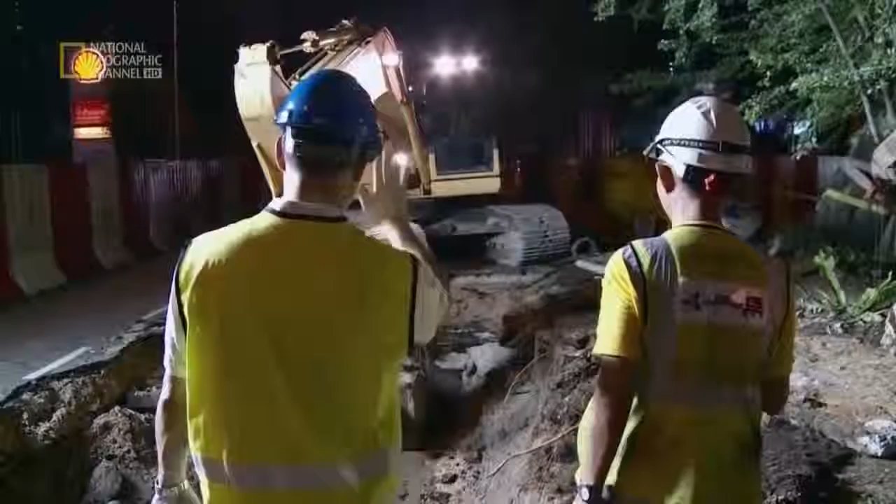President Obama is living nearby. We definitely don't want to cut off water and power to where Mr. Obama is living, obviously, so we're trying to get this done in the quickest time possible. Racing against time, the Bull Gang takes 5 hours to repair the water pipes and fill the hole. As they work into the night, President Obama and his entourage are blissfully unaware of the battle being fought less than 400 meters from their hotel.

TBM 774 is now approaching the zone where the underground geology changes from karstic limestone to the Kenny Hill Formation - from Swiss cheese to Edam. We are going through a very distinct change in ground conditions. In normal cases, you would need to use 2 different types of machines, and you would need another launch shaft to do this - it would take months. But the new variable density TBMs can be retooled underground.

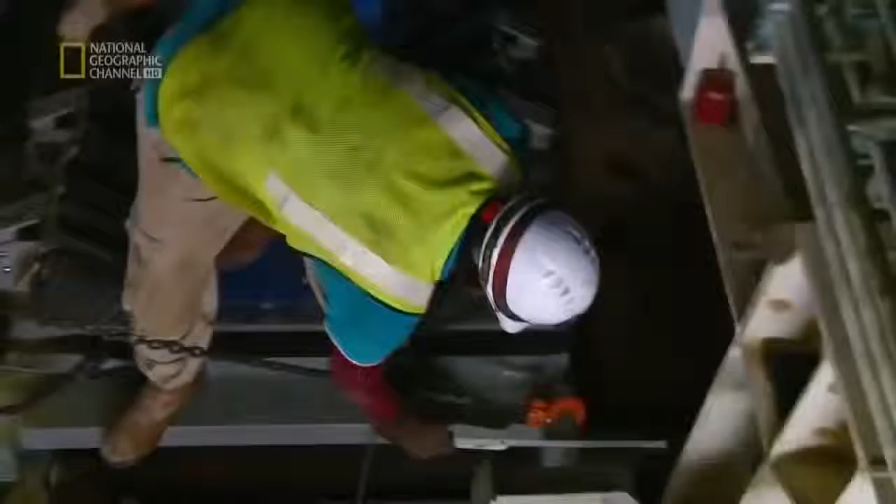It's a matter of changing the way waste is extracted. Instead of extracting through pipes, it needs to be removed with a system of conveyor belts right to the end of the gantries onto these so-called muck cars. The conversion takes 1 week to complete, but it's a much smoother process than the older system.

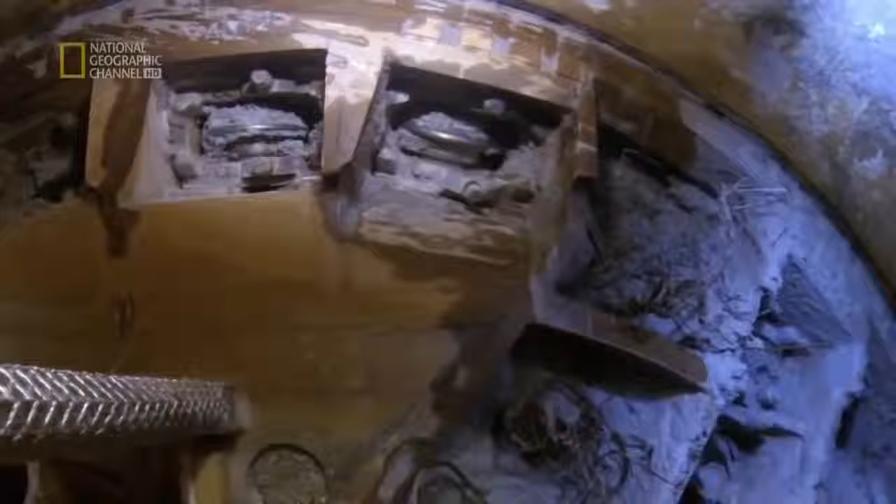But a much bigger hurdle awaits the TBM 774, an underground tangle of steel wires that could bring the TBM to a standstill. 30 meters beneath Kuala Lumpur's nightlife hotspot, Bukit Bintang, engineers excavating the underground section of the city's new MRT encounter an unexpected obstacle.

Contractors of a shopping mall adjoining the street have left steel wires known as ground anchors in place, and these are bang in the path of the TBM. Put into the ground as temporary supports for the basements, they could hold up work for months.

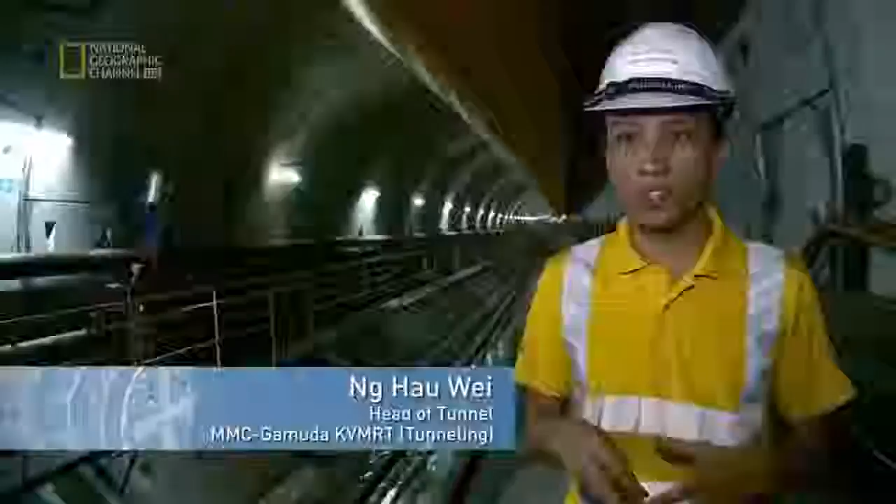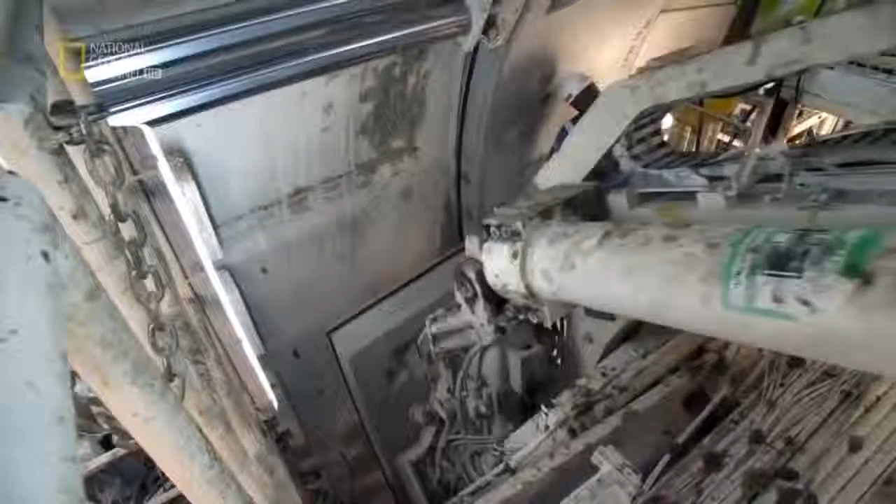It's very difficult to find them from the surface, and you cannot remove them from the basement anymore because the permanent walls are built. They are all covered. Since the steel wires cannot be extracted, a decision is made to push on through with the TBM. But there is a continuous risk that the drill head may become entangled and damaged in the wires.

It is the task of engineer Ng Hau Wei to monitor the tunnel ahead. So in the morning, actually, we found some ground anchors dropped underneath the conveyor belt, and we decided to stop the TBM, look for the ground anchors, cut it and remove it.

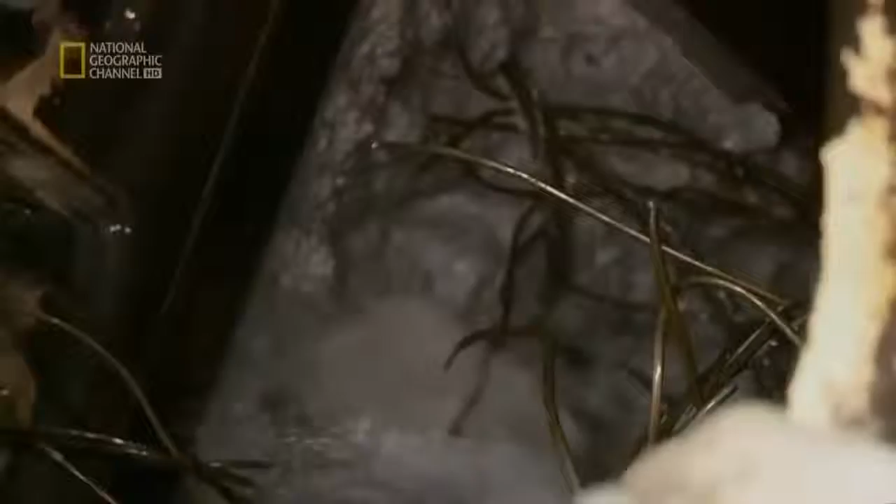A team now has to enter the space around the cutter head at the front of the TBM. There's little space to maneuver, and temperatures are close to 40 degrees Celsius. To overcome this tangle, first, the team washes away earth from the cutter, exposing the snarl of steel wires caught in the cutter head. These must be cut away with an oxyacetylene torch. It's a laborious process.

Every time they hit the ground anchors, the TBM halts as the wires are trimmed away. It takes 2 weeks to mine through this web, but it could have been worse. If we had hit all the ground anchors that we expected, it would have delayed the project by about 3 to 4 months. And we were able to go down and cut these ropes so that they weren't stopping the cutter head from turning, and we carried on.

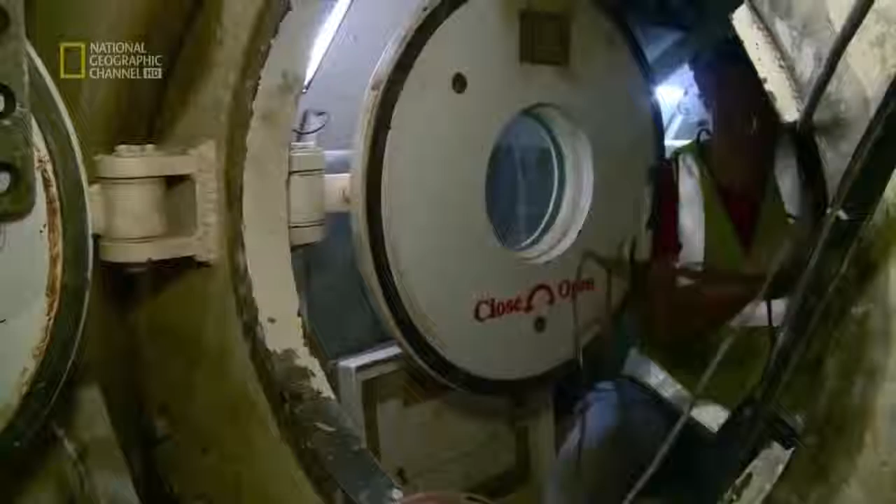It's the final breakthrough. After 23 months of excavation, from tomorrow, the TBM will fall silent. The honor goes to TBM 774. This was the first TBM to be launched into the limestone labyrinth under Kuala Lumpur. It has burrowed its way through almost 5 torturous kilometers of rock and soil. Now it must make the final breakthrough.

It's a thrilling day for the engineers inside the giant machine. We are about to break through. We have about 400 mm left on the cut. Hopefully we'll get a successful breakthrough.

What's happening now is we're cutting the D-wall, so that's basically the barrier between us and open air. So this is a very exciting moment for us. Any moment now, maybe within the next half an hour, we'll be out in the station.

This is actually the first TBM that we launched back in 2013. Less than 2 years, just short of 2 years, we have done 20 kilometers of tunneling. This is a great day for me and for the whole team.

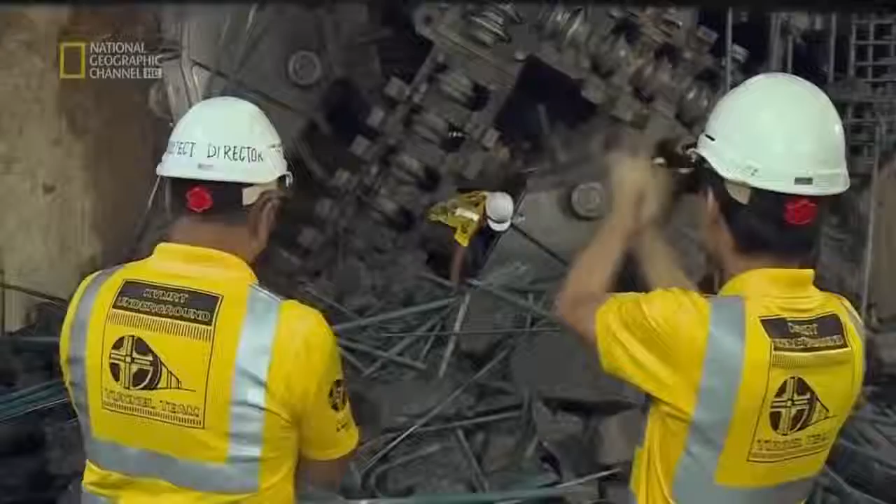This is the completion of our actual tunnel mining, and which is probably the highest risk on the project. Smart had over 50 sinkholes in its similar sort of level drive, and on this project, we've had only about 3. We used a variable density machine effectively, and that has proven to be a success.

Just weeks ago, MMC Gamuda won the Technical Innovation of the Year award for the variable density TBM in the United Kingdom. It's the biggest development in TBM technology in the last 25-30 years. So we have witnessed something new in this business. These are the most versatile machines existent at the moment. This is the future.

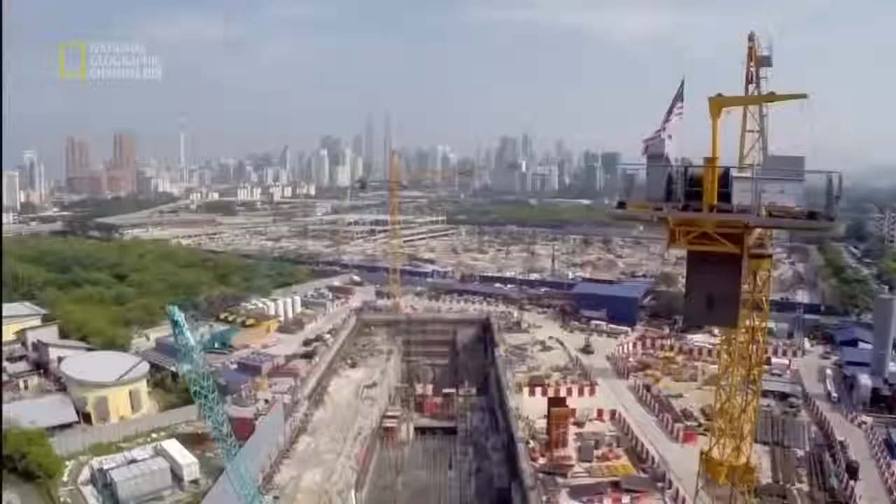The last breakthrough is a landmark moment. Now the race is on to complete the stations and get the MRT running. Only then can Kuala Lumpur's clogged up traffic arteries become truly open for business.

You're basically going to live in a modern metropolis of the 21st century. This is the new world that people of Greater Kuala Lumpur can look forward to. A city seamlessly integrated by overground and underground MRT lines, linking together the city's heart and its far-flung suburbs, where today's gridlock is a distant memory.